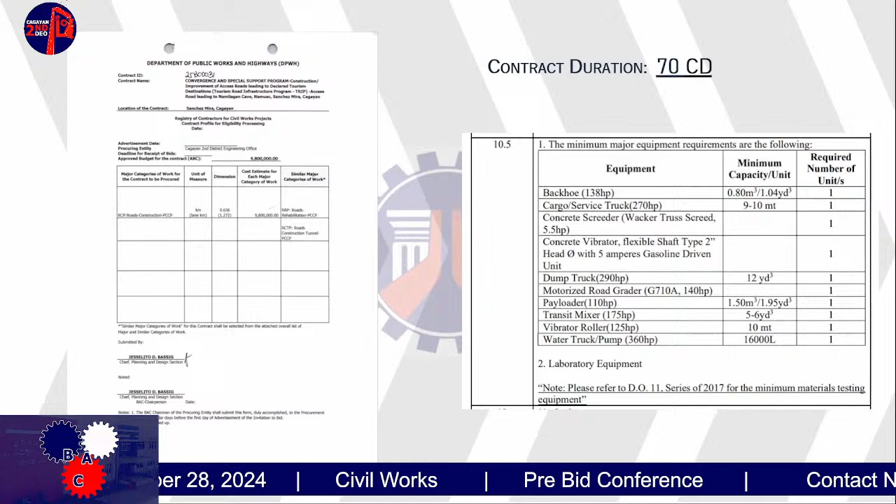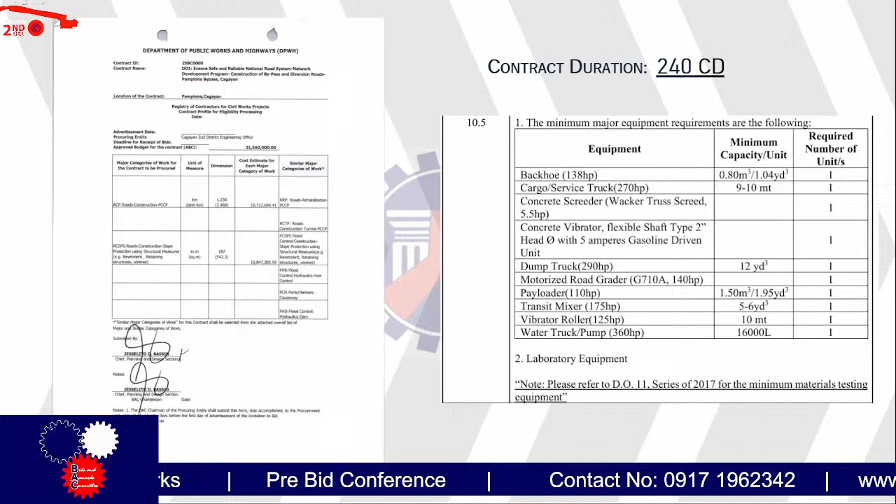Good morning, Mr. Chair. First project, contract ID 25BC0005. The contract name: Ensure Safe and Reliable National Road System, Network Development Program, Construction of Bypass and Diversion Roads, Pamplona Bypass, Cagayan. The approved budget for the contract is 21,560,000 pesos only. This project has two major categories of works.

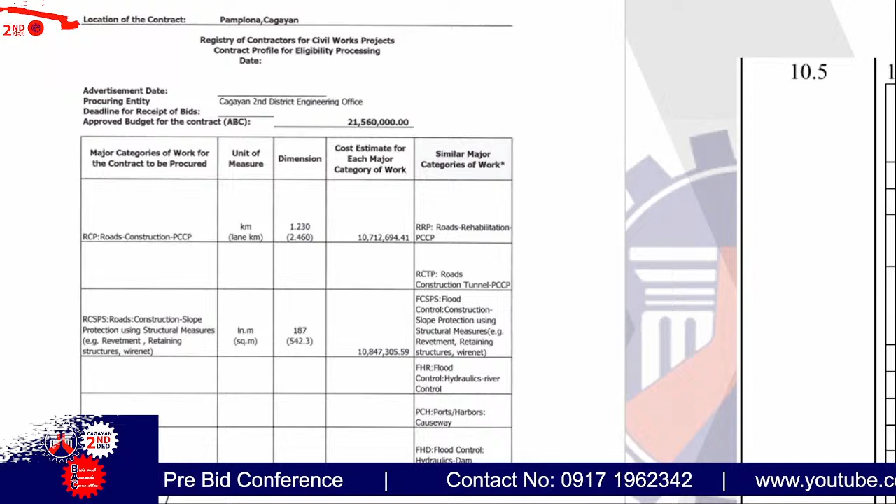Number one is RCP Roads Construction, PCCP. It has a length of 1.23 kilometers with a cost estimate of 10,712,694.41 pesos. The second major category of work is RCSPS, Roads Construction, Slope Protection using Structural Measures.

The length for the slope protection is 187 linear meters with a cost estimate of 10,847,305 pesos and 59 centavos. This project, Mr. Chair, has a total contract duration of 240 calendar days.

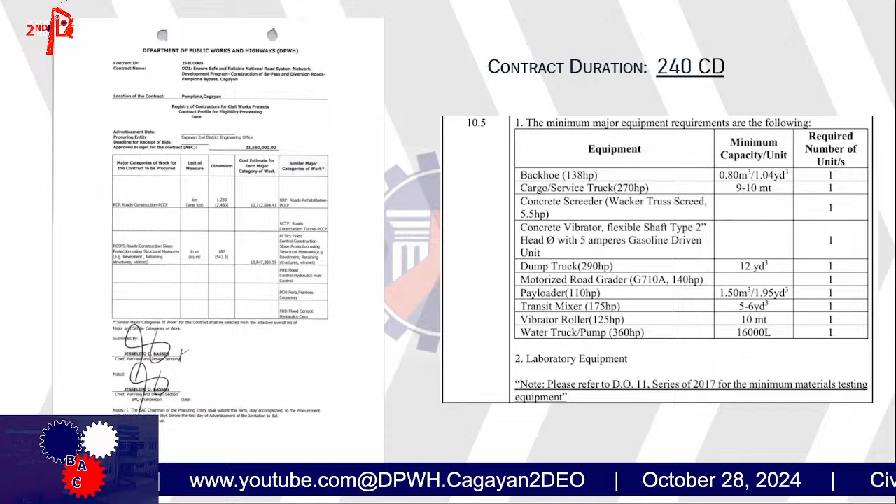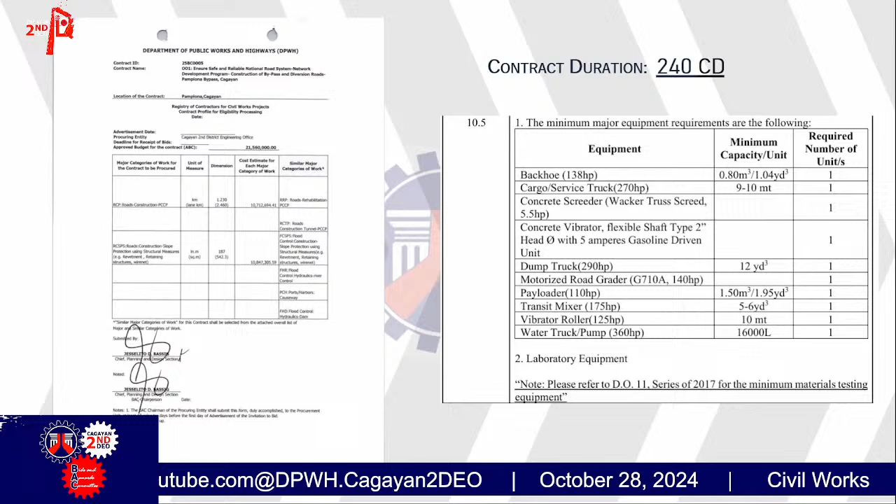The scope of works for this project, Mr. Chair, is the removal of actual structures, embankment from roadways, structure excavation, embankment from borrow, common soil, subgrade preparation, common material, aggregate sub-base course, crack and seat, PCCP 0.15 meter thick, PCCP 0.28 meter thick, structure excavation, foundation fill, pipe culverts and drain excavation for the slope protection, reinforcing steel grade 40, structural concrete, and pipe culvert with a diameter of 910 mm.

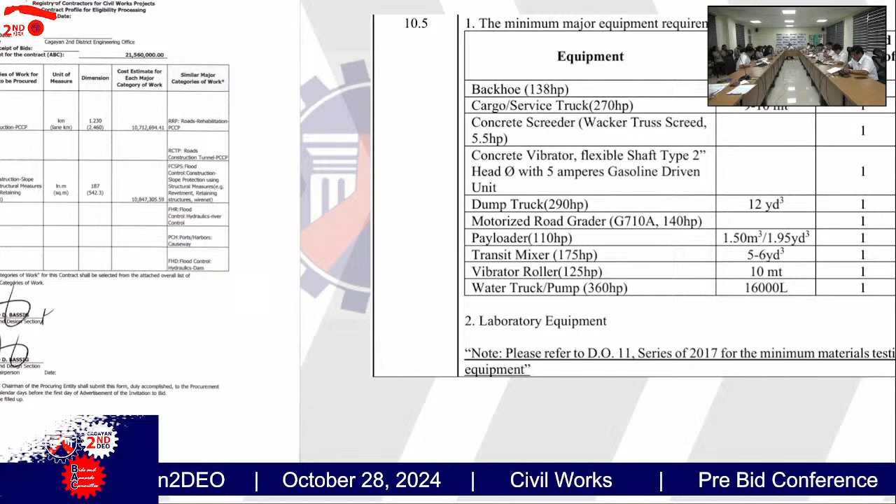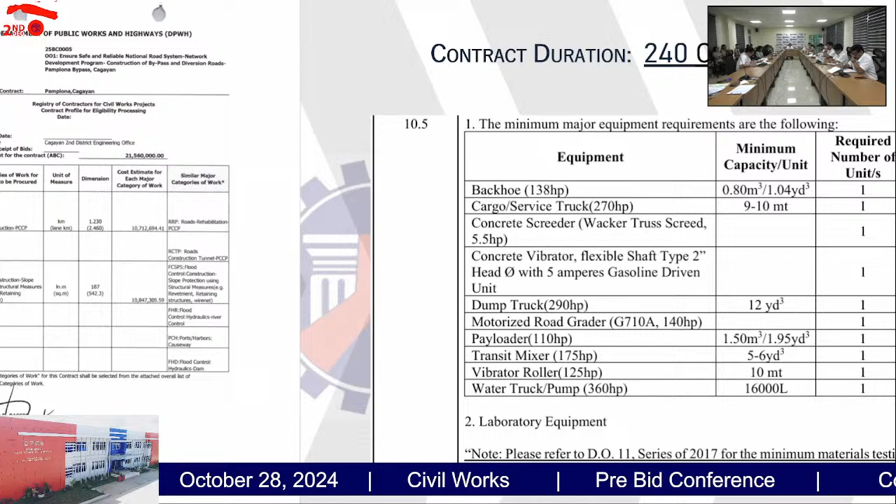The minimum equipment requirement for this project, Mr. Chair, is 1 backhoe, 1 cargo or service truck, 1 concrete screeder, 1 concrete vibrator, 1 dump truck, 1 motorized road grader, 1 payloader, 1 transit mixer, 1 vibratory roller, 1 water truck, and 1 sealer joint, Mr. Chair.

Okay. Any question? Any comment?

TWGs? Wala ba kayong comment? For correction?

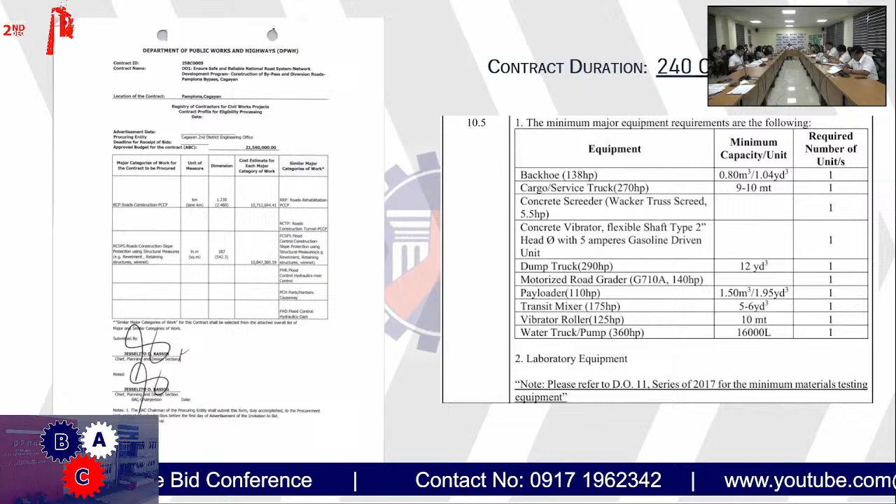So since there's none, let's proceed to the next project. Under contract ID 25BC0026, Convergence and Special Support Program, construction improvement of access roads leading to declared tourism destinations: Matukay, Silagan Road leading to Silagan Falls and Caves, Barangay Silagan, Allacapan, Cagayan. Okay?

Engineer Bunao, will you discuss this, please? Thank you, Mr. Chair. A pleasant morning to each and everyone.

Contract ID 25BC0026, Convergence and Special Support Program, construction improvement of access roads leading to declared tourism destinations: Matukay Silagan Road leading to Silagan Falls and Caves, Barangay Silagan, Allacapan, Cagayan. For the approved budget for the contract, 6,370,000 pesos. For the major categories of work for the contract to be procured: roads construction, PCCP, with a length of 353 meters. The contract duration of the project is 68 calendar days. For the scope of works, there are two components of the project.

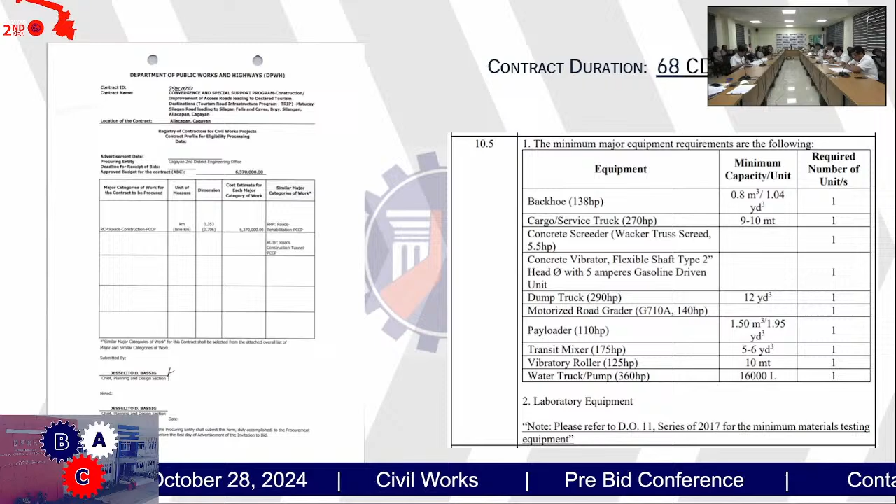For civil works 1: earthworks includes removal of trees, embankment from roadway structure excavation, embankment from borrow, subgrade preparation. For the sub-base and base course, item 200, aggregate sub-base course. For the surface course, gravel surface course and PCCP unreinforced with thickness of 15 centimeters and 23 centimeters respectively. For miscellaneous structures: trees, furnishing, and transplanting.

For civil works 2: earthworks includes structure excavation, foundation fill, pipe culverts, and drain excavation. For the drainage and slope protection structures: reinforcing steel, structural concrete, lean concrete, and RCPC with a diameter of 910 millimeters.

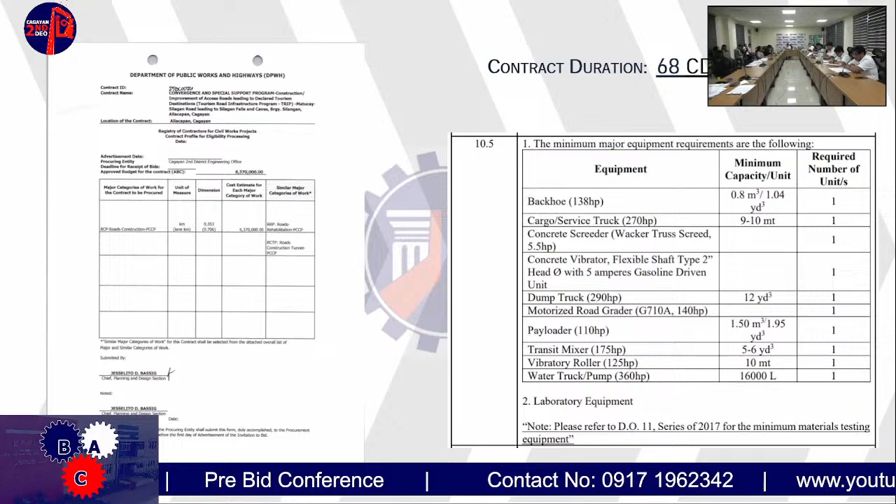For the minimum equipment requirement: 1 backhoe, 1 cargo service truck, 1 concrete screeder, 1 concrete vibrator, 1 dump truck, 1 motorized road grader, 1 payloader, 1 transit mixer, 1 vibratory roller, 1 water truck, and sealer joint. That's all, Mr. Chair.

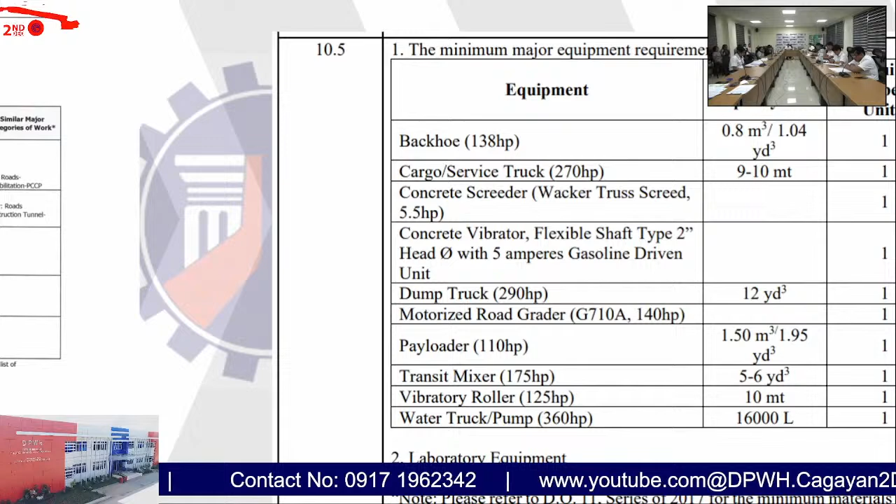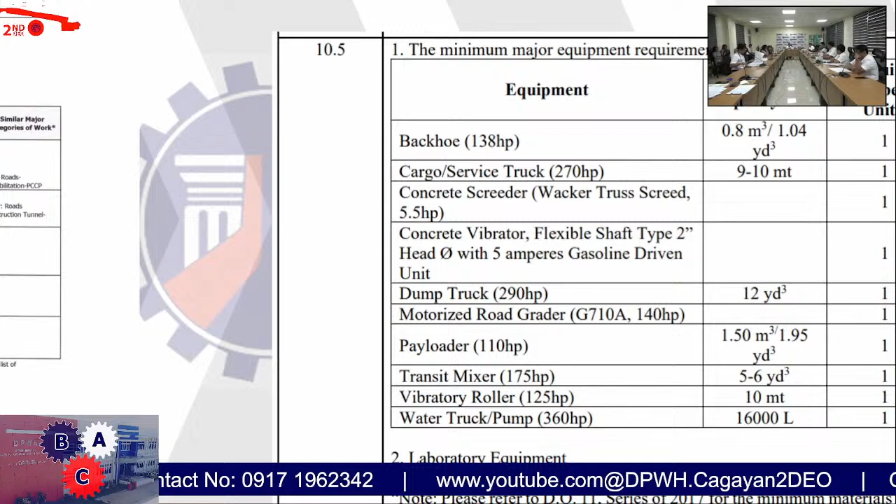Okay, any comment? I think there's none, so let's proceed to the next project. Convergence and Special Support Program, construction improvement of access road leading to declared tourism destinations: access road leading to Namilagan Cave, Namuac, Sanchez Mira, Cagayan.

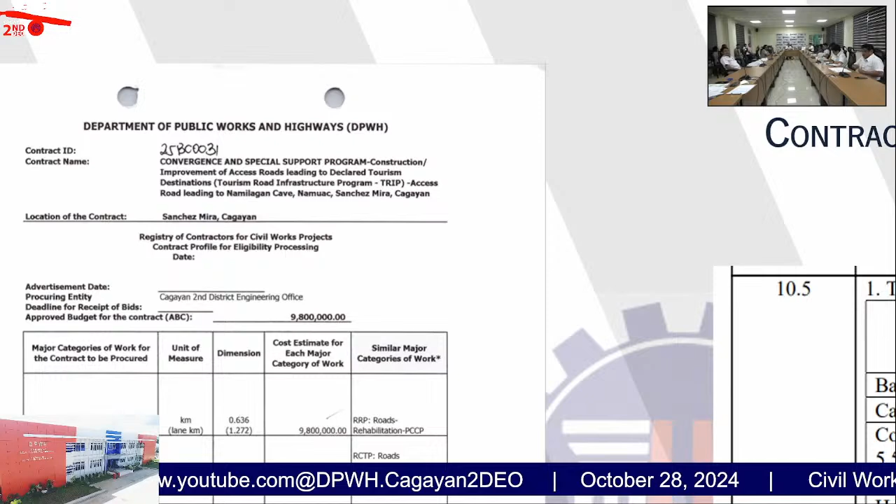Okay? Engineer Tesani, De la Cruz. Okay, good morning everyone. Mr. Chair, 25BC0031, Convergence and Special Support Program,

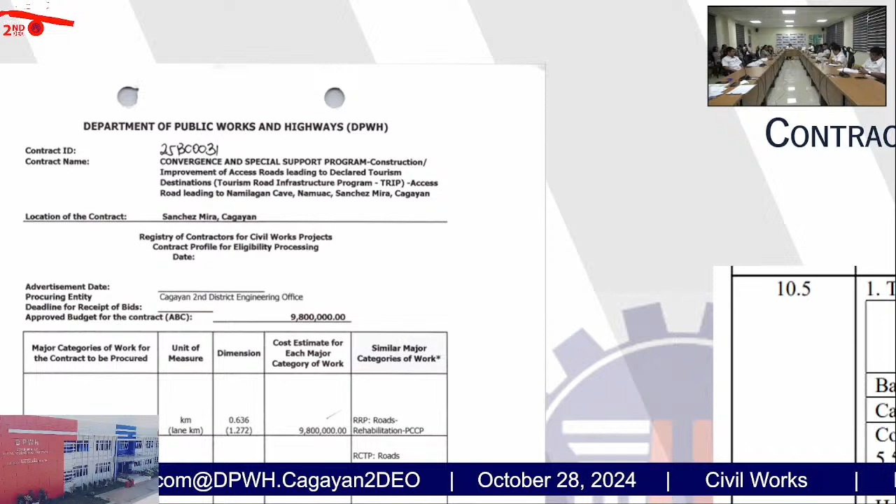construction or improvement of access roads leading to declared tourism destinations, Tourism Road Infrastructure Program, TRIP. Access road leading to Namilagan Cave, Namuac, Sanchez Mira, Cagayan, with an ABC of 9.8 million pesos. For the major categories of work for the contract to be procured: roads construction, PCCP, with a length of 636 meters, with the cost estimate for each major category of work at 9.8 million pesos.

For the minimum equipment requirement: one backhoe, one cargo or service truck, one screeder, one concrete vibrator, one dump truck, one motorized grader, one payloader, one transit mixer, one vibratory roller, one water truck or pump, and one sealer joint. Mr. Chair, the project has 70 calendar days.

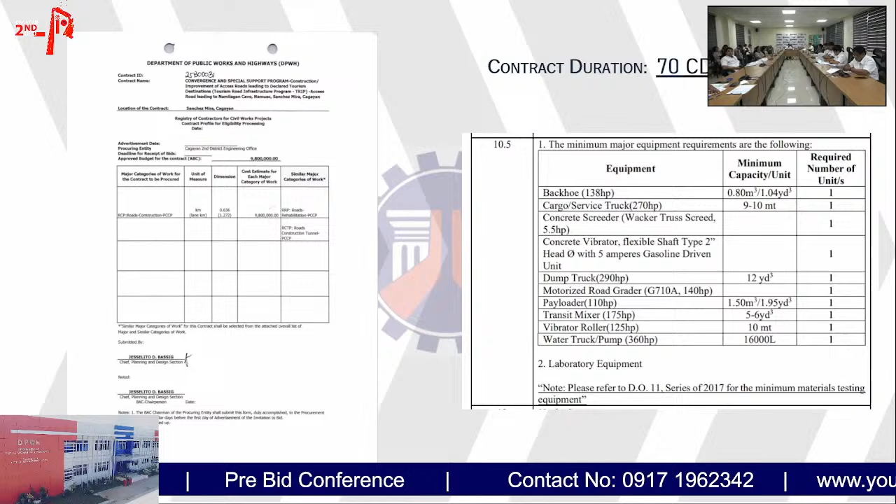For the scope of work, we have 2 civil works for this project. For civil works one, we have the facilities for the engineer, which includes provision of progress photographs for general requirements, permits and clearances, fees for the cutting of coconut trees, and 3 billboards, occupational safety and health program, traffic management, and mobilization or demobilization. For earthworks, this includes clearing and grubbing, individual removal of trees, embankment from roadway or structure excavation of common soil, embankment from borrow of common soil, subgrade preparation.

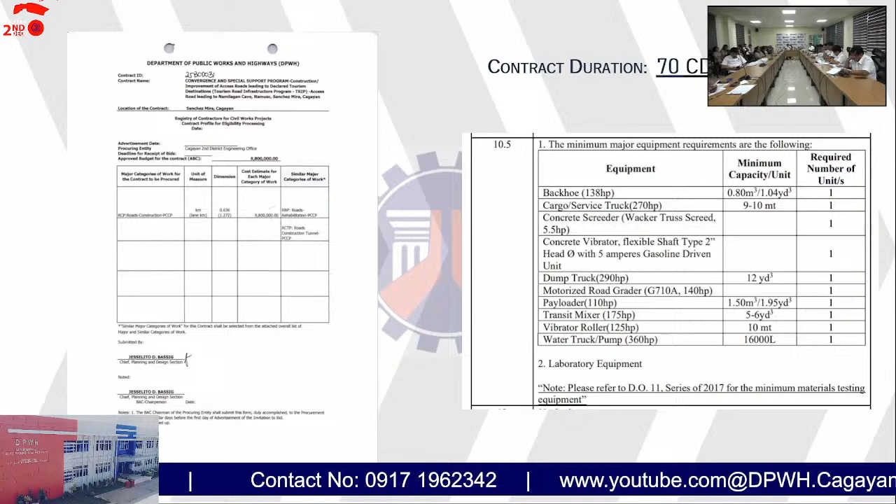For the sub-base and base course: aggregate sub-base course with a thickness of 0.2 meters. For the surface course, it includes gravel surface course for the gravel shoulder and PCCP 0.15 meter thick for the paved shoulder. For the carriageway, PCCP 0.23 meter thick, with miscellaneous structures which includes trees.

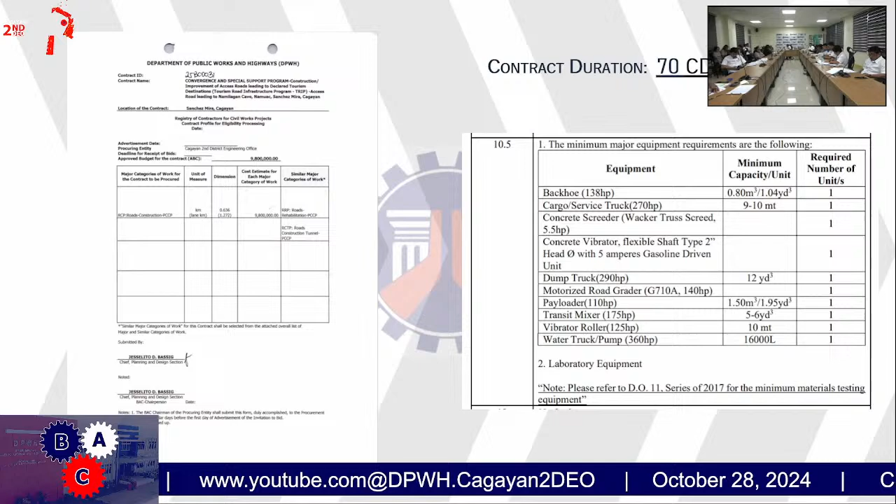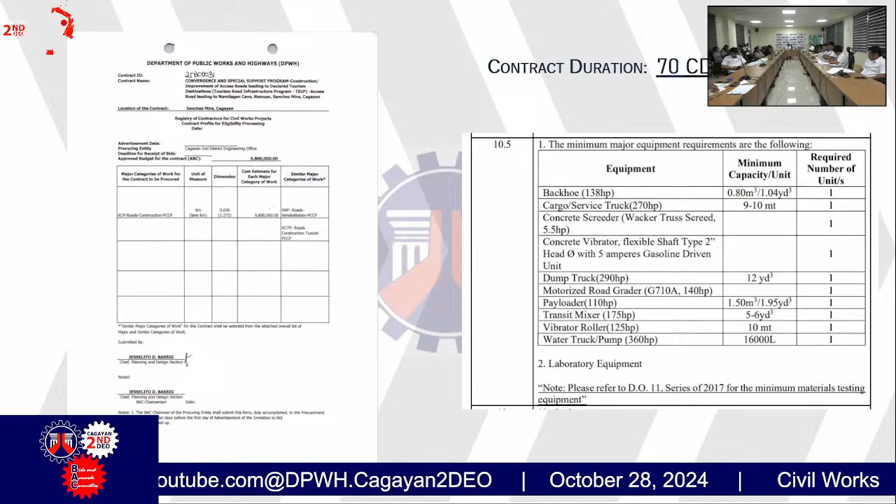And for civil works 2, it includes removal of existing structures or obstruction of 610 millimeter diameter RCPC, structure excavation, and foundation fill. For the drainage and slope protection structures, it includes reinforcing steel grade 40, structural concrete for retaining wall and head wall, lined canal, rectangular concrete, and pipe culverts for the extension of existing NIA cross drain. That's all, Mr. Chair, thank you.

Thank you. So the bid documents for this project is 10,000 pesos only.

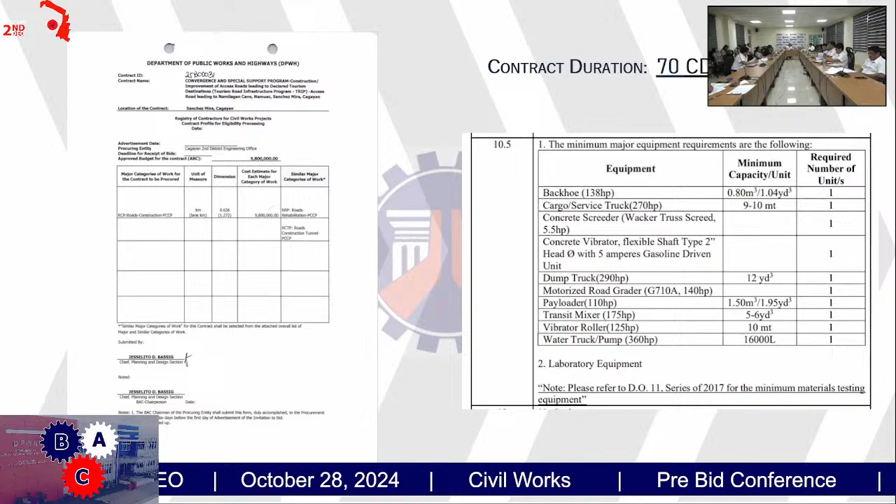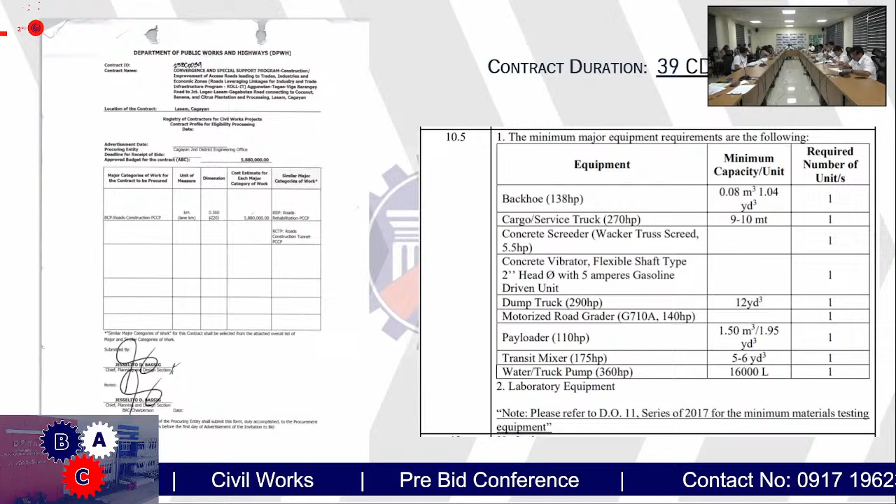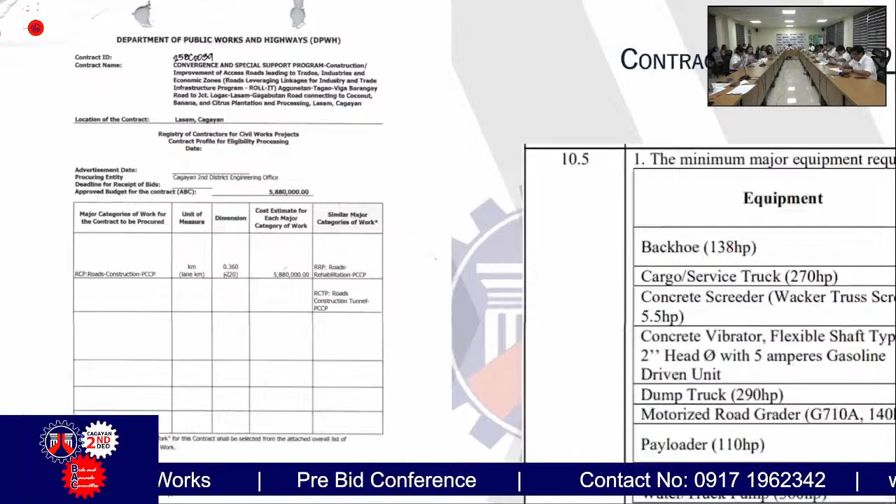Convergence and Special Support Program, construction improvement of access roads leading to trades, industries, and economic zones. Roads leveraging linkages for industry and trade infrastructure program, ROLL-IT, Aggunetan, Tagao, Viga Barangay Road to Junction Logac, Lasam Gagabutan Road, connecting to coconut, banana, and citrus plantation and processing, located at Lasam, Cagayan.

So, who will discuss this? Okay? Your... Okay, thank you, Mr. Chair. And good morning to everyone.

For contract ID number 25BC0039, Convergence and Special Support Program, Construction, Improvement of Access Road leading to trade, industries, and economic zones, linkages for industry and trade infrastructure program, Aggunetan, Tagao, Viga, Barangay Road to Junction Logac, Lasam, Gagabutan Road connecting to coconut, banana, and citrus plantation and processing, Lasam, Cagayan.

The budget for the contract is 5,880,000 pesos only. For the major categories of work for the contract to be procured: roads construction PCCP with a net length of 360 meters. Similar major categories of work: roads rehabilitation PCCP, roads construction tunnel PCCP. The contract duration is 39 calendar days.

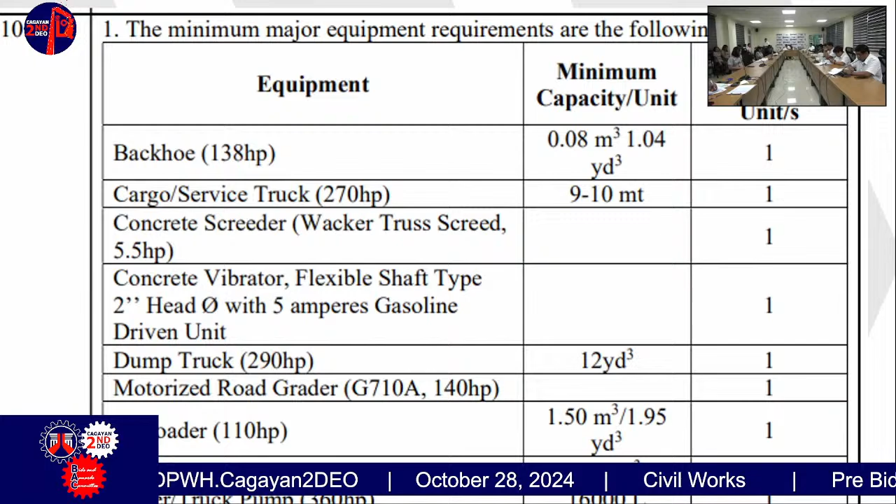For the scope of work to be done, we have the facilities for the engineer that includes provision of progress photographs, the other general requirements that includes project billboard, occupational safety and health program, traffic management, and mobilization and demobilization. For the earthworks, it includes surplus common excavation, foundation fill, embankment from roadway, subgrade preparation, and common materials. For the subbase and base course, it includes aggregate subbase course.

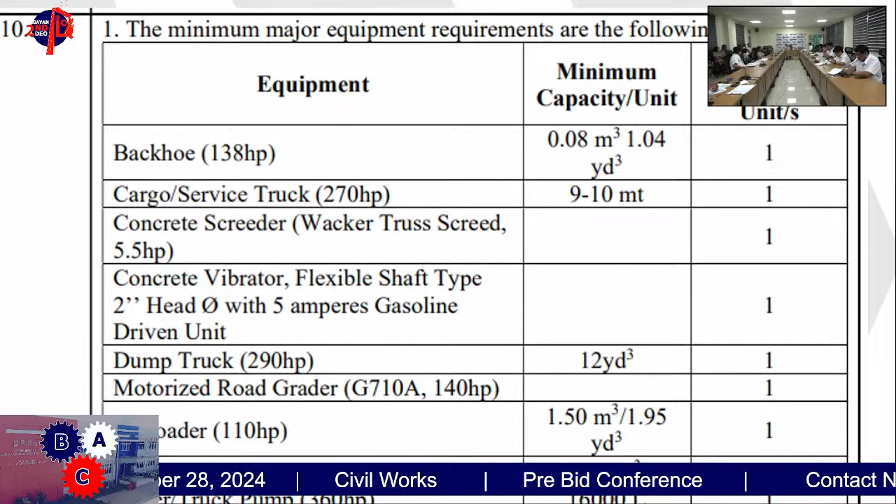For the surface course: gravel surface course, Portland cement concrete pavement unreinforced 0.15 meter thick, Portland cement concrete pavement unreinforced 0.28 meter thick. And the miscellaneous structures includes curb and gutter precast.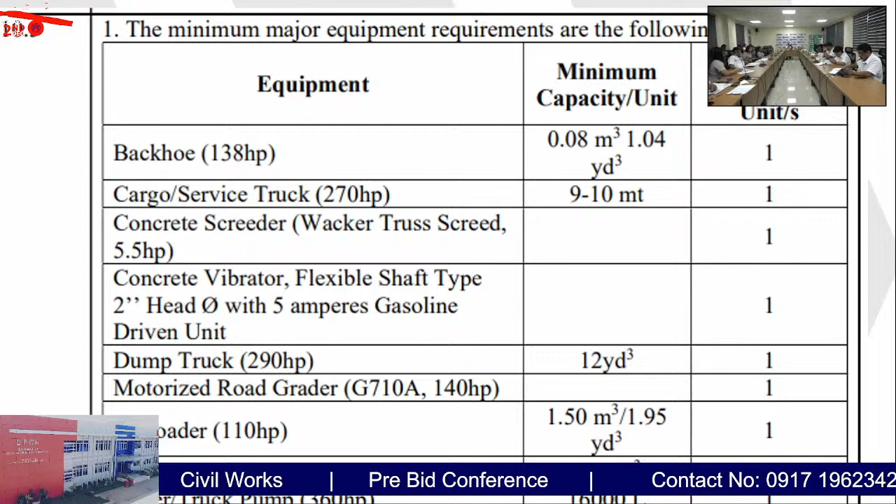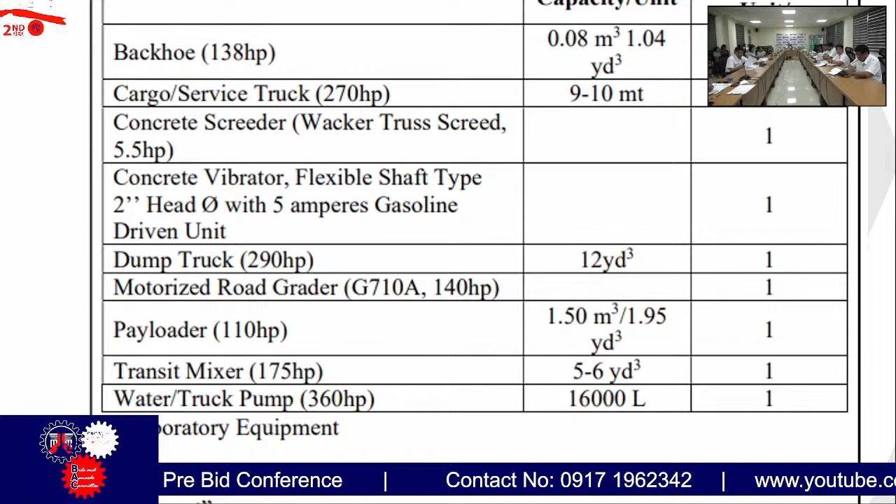For the minimum equipment requirement for this project, we have one backhoe with a capacity of 0.08 cubic meter, one cargo service truck with a capacity of 9 to 10 metric tons, one concrete screeder, one concrete vibrator, one dump truck with a capacity of 12 cubic yards, one motorized road grader, one payloader, one transit mixer with a capacity of 5 to 6 cubic yards, one vibratory roller, one water truck, and one sealer joint. That's all, Mr. Chair.

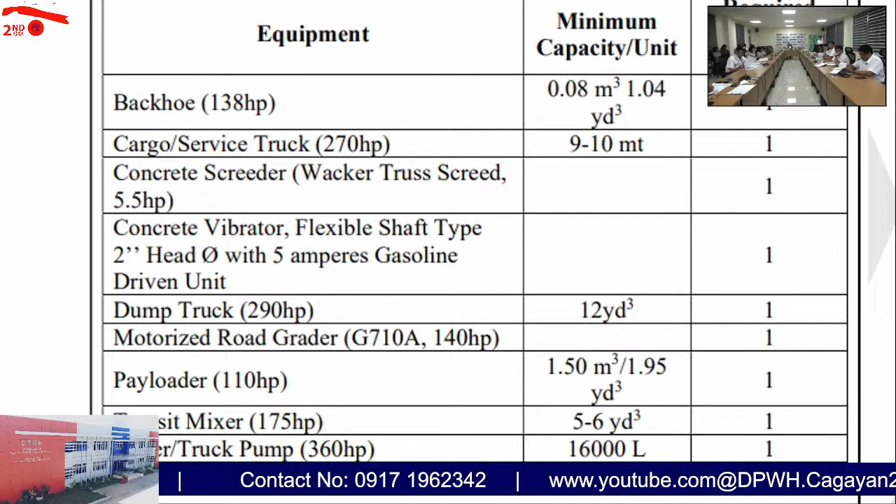Okay, any comment? The bid documents for this particular project is 10,000 pesos only. Mr. Chair, may I also require the Secretariat to monitor our live streaming if there are comments? Yeah.

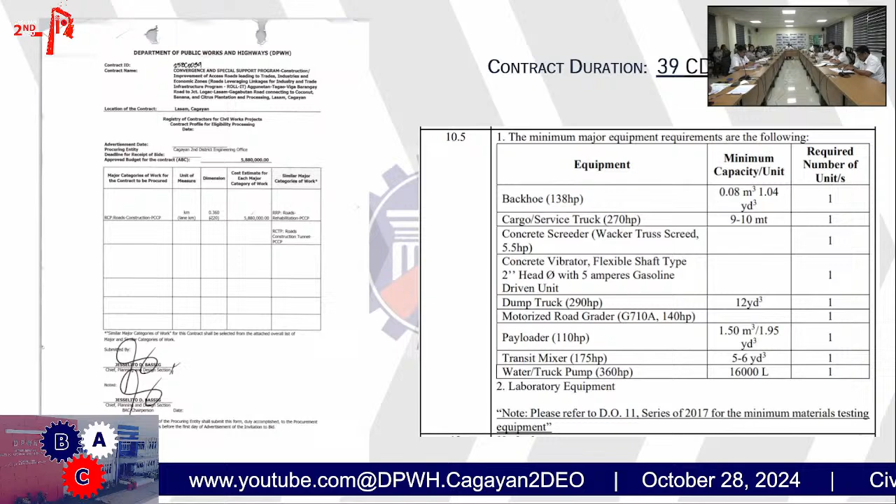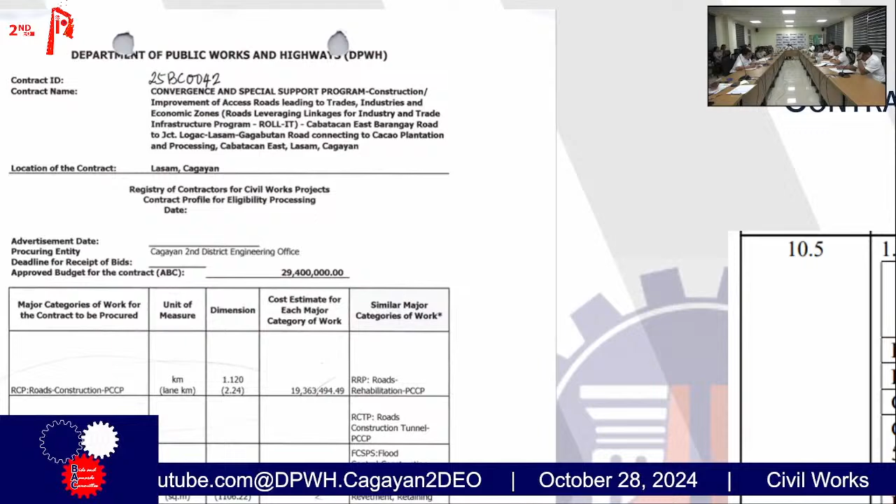Convergence and Special Support Program, construction improvement of access roads leading to trades, industries, and economic zones. Roads leveraging linkages for industry and trade infrastructure program, ROLL-IT, Cabatacan East Barangay Road to Junction Logac Lasam Gagabutan Road, connecting to cacao plantation and processing, Cabatacan East Lasam Cagayan.

The bid documents for this project is 25,000 pesos only. So may I request one of our TWG here to read the description of this particular project. You know... King. Okay, King, let's. Good morning, Mr. Chair.

The next project is 25BC 0042. The contract name, Convergence and Special Support Program, construction improvement of access roads leading to trade, industries, and economic zone, roads leveraging linkages for industry and trade infrastructure program, ROLL-IT, Cabatacan East, Barangay Road to Junction, Logac, Lasam, Gagabutan Road, connecting to cacao plantation and processing, located at Cabatacan East, Lasam, Cagayan.

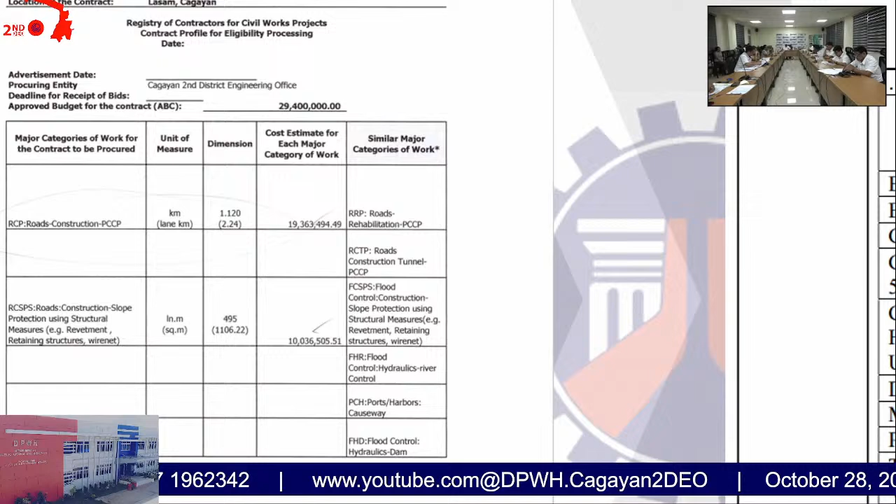The next major category of work is the RCSPS, Roads Construction Slope Protection using structural measures. The length of this slope protection is 495 linear meters with a cost estimate of 10,036,505 pesos and 51 centavos. This project has a total contract duration of 214 calendar days.

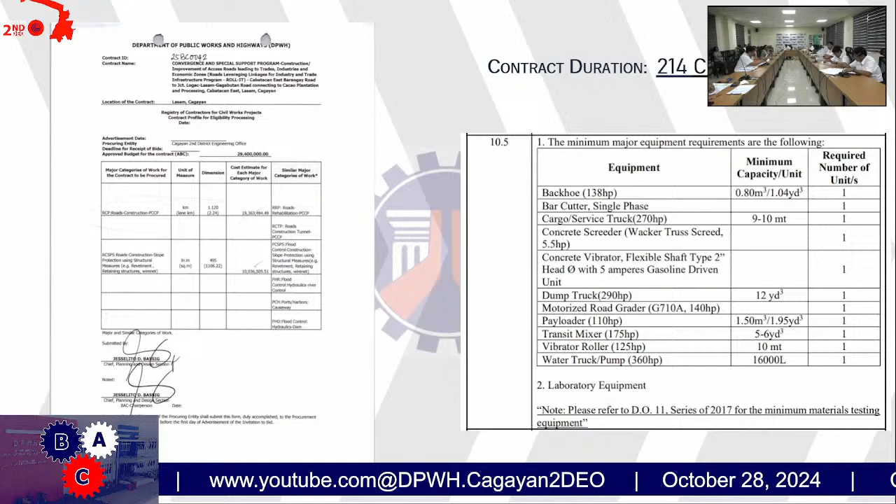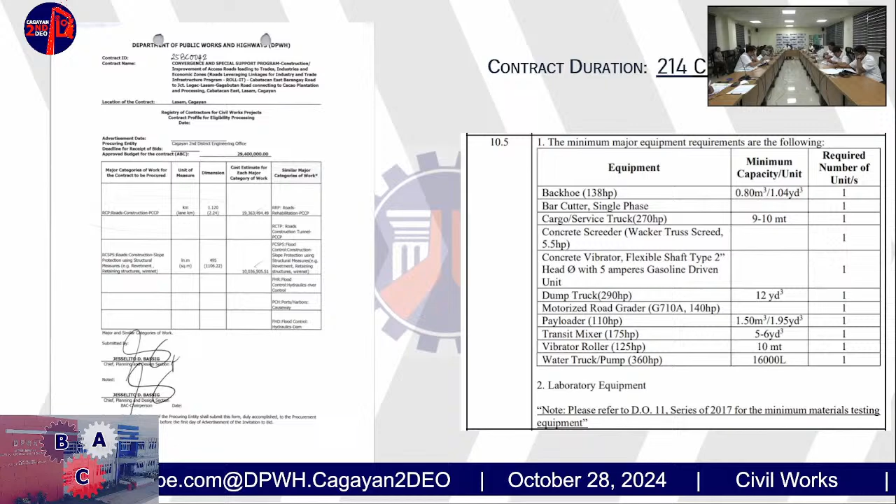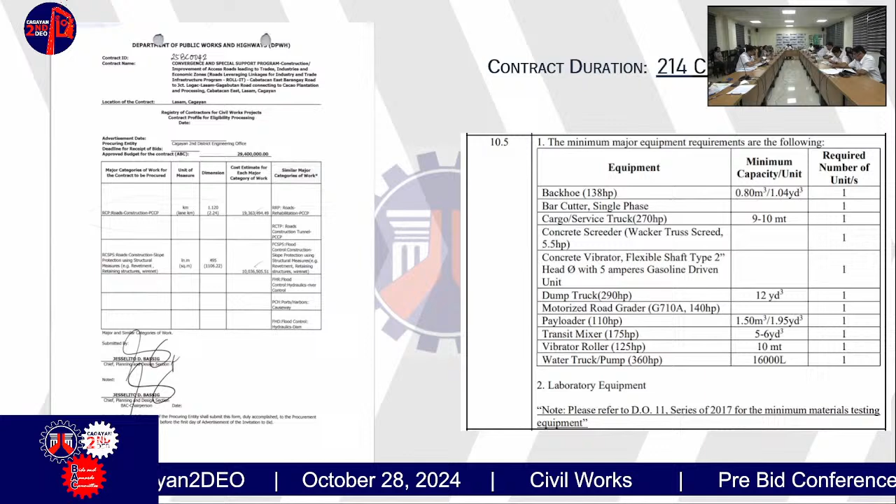The scope of works for this project, for the roads, is clearing and grubbing, individual removal of trees 150 to 300mm diameter, individual removal of trees 301 to 500, as well as 751 to 900mm diameter. Surplus common excavation, embankment from roadway, structure excavation, subgrade preparation, common material, aggregate sub-base course, gravel surface course, PCCP 0.15 meter thick, PCCP 0.28 meter thick, and for the trees, furnishing and transplanting.

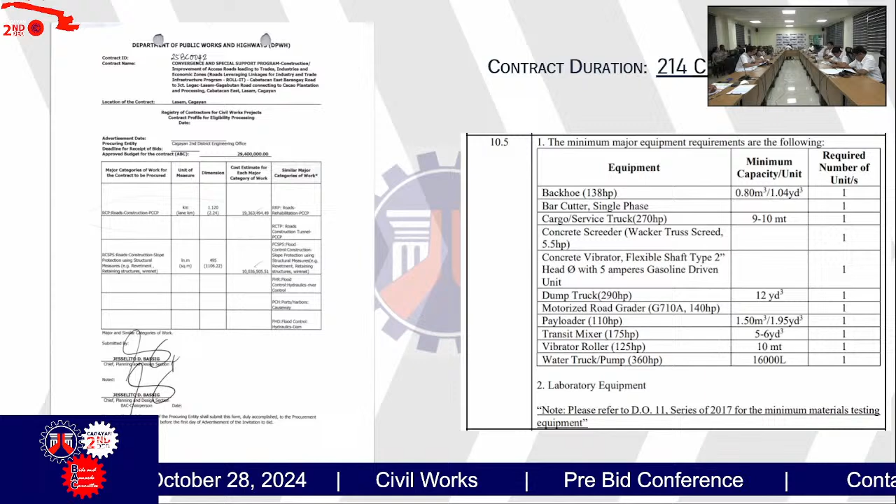For civil works 2, we have the structure excavation common soil, foundation fill, pipe culverts and drain excavation, reinforcing steel grade 40, structural concrete 20.68 megapascal class A, pipe culverts 910mm in diameter.

The minimum equipment requirement for this contract is 1 backhoe, 1 bar cutter, 1 cargo or service truck, 1 concrete screeder, 1 concrete vibrator, 1 dump truck, 1 motorized road grader, 1 payloader, 1 sealer joint, 1 transit mixer, 1 vibratory roller, and 1 water truck.

For the information of everybody, we have a proposed supplemental bulletin for this project for an additional item, which is the clearing and grubbing. This project has a total length of 1,120 meters or 2.24 lane kilometers. That's all, Mr. Chair.

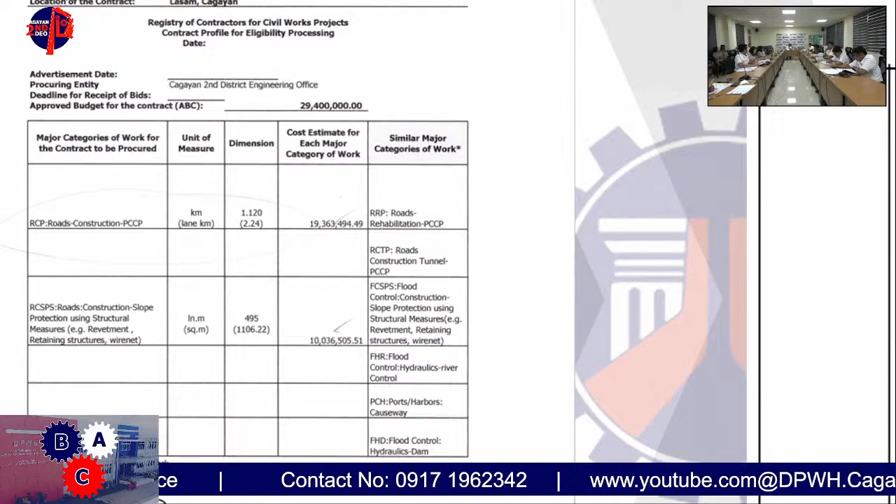Mr. Head, Bids Secretariat, is there a bid bulletin for this? Is there any?

Not yet posted, sir. It is a proposed supplemental bulletin. Also, for the information of the body, the schedule for the opening of bid will also be adjusted to meet the requirements of RA 9184, which requires 12 days from the conduct of the pre-bid conference. Okay, please take note of that.

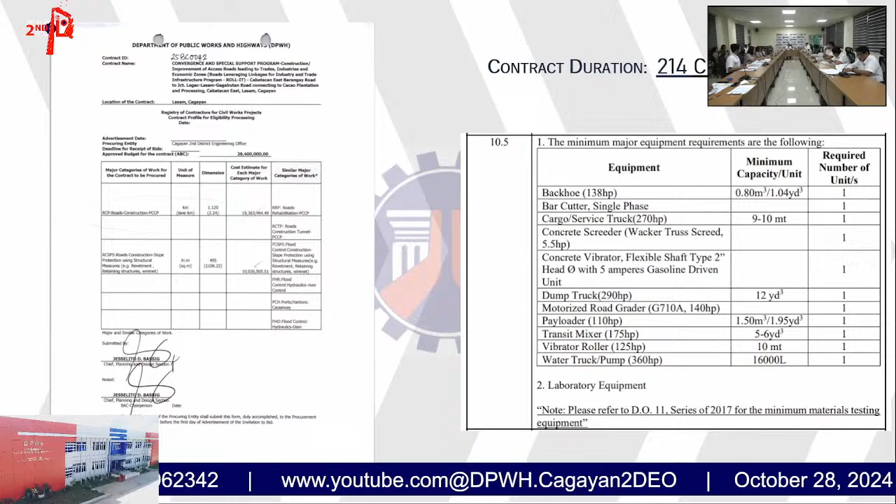So any other query, question, or comment? Mr. Chair, I would like to also clarify the first project, the Pamplona bypass.

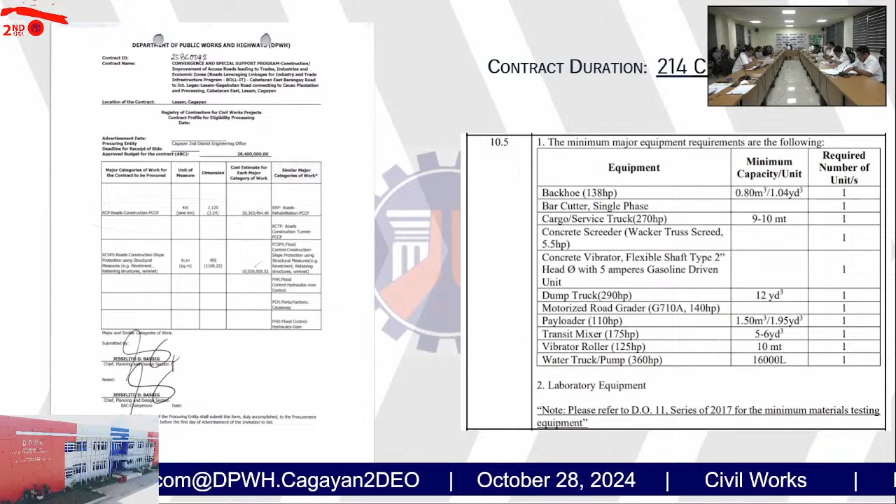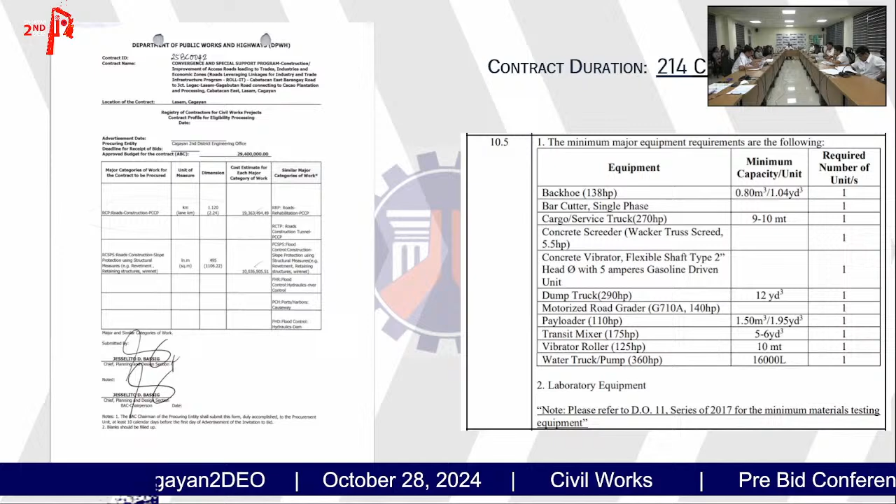We have also a proposed supplemental bulletin. The original posted length for the RCP is 1.23 kilometers, but the corrected length of the first civil work, which is the RCP, is 0.593 kilometer.

And also for the civil works two, Mr. Chair, the road slope protection: the original length is 187 linear meters, and the corrected length of the slope protection, Mr. Chair, is 873 linear meters.

That's all, Mr. Chair. Okay, please take note, Bids Secretariat, of the changes so that we could post that in our bulletin, maybe today. If all documents are prepared today, we will also post this today.

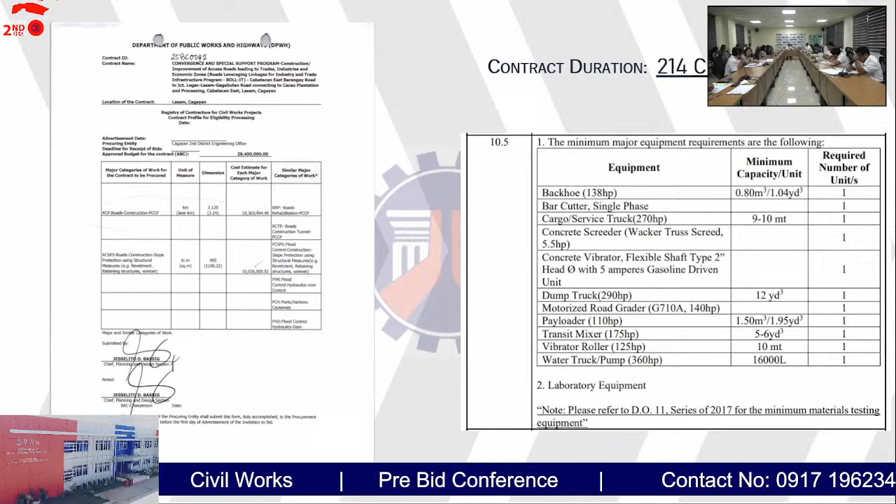Can we not prepare it today so that... Yes, sir, we will try to post it today, sir. Okay, please take note.

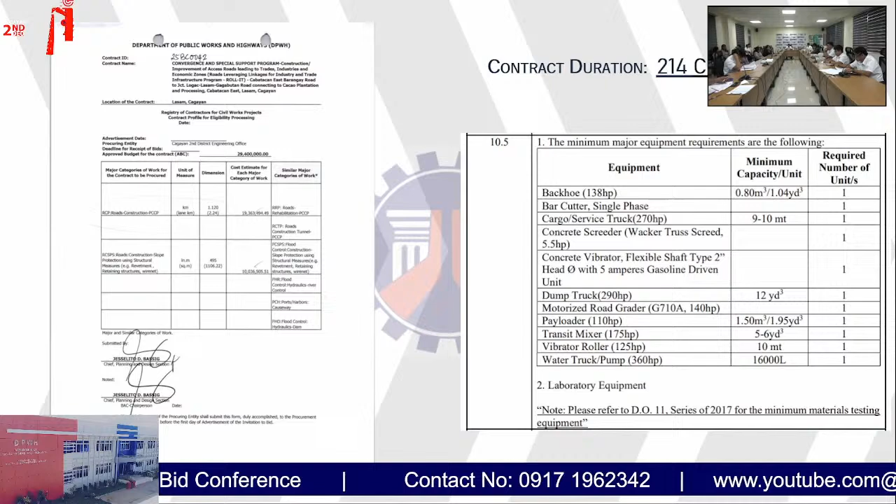Okay, let's proceed to the next: Convergence and Special Support Program, construction and/or improvement of access roads leading to trades, industries, and economic zones, roads leveraging linkages for industry and trade infrastructure program, ROLL-IT.

Dungon Barangay Road to Manila North Road connecting to agribusiness industry, at Santa Cruz, Pamplona, Cagayan. Bid documents for this is 10,000 pesos only.

So we will discuss this. Mr. Chair, contract 425BC0047, contract name: Convergence and Special Support Program, construction or improvement of access roads leading to trades, industries, and economic zones, roads leveraging linkages for industry and trade infrastructure program, ROLL-IT, Dungon Barangay Road to Manila North Road connecting to agribusiness industry, Nipa and Corn, at Santa Cruz, Pamplona, Cagayan, with an approved budget for the contract of 5,390,000 pesos. For the major categories of work: roads construction, PCCP,

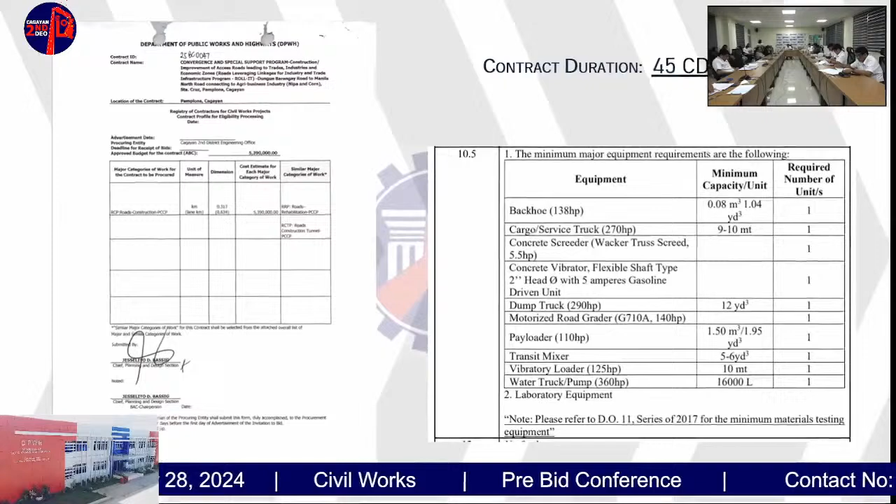For the scope of work, we have two civil works again for this project. Civil works 1 includes clearing and grubbing, individual removal of trees, embankment from roadway or structure excavation, embankment from borrow, common soil, subgrade preparation, common material, aggregate sub-base course, 0.15 meter thick.

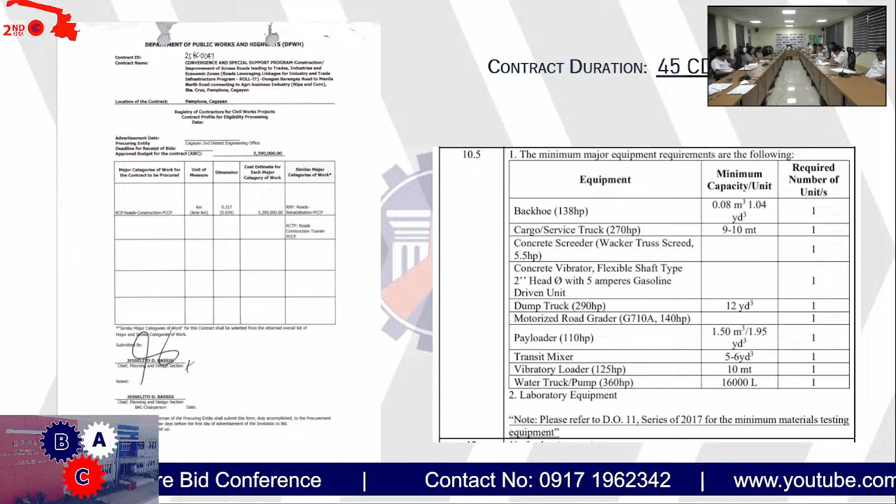For the gravel shoulder, gravel surface course, and for the paved shoulder, PCCP 0.15 meter thick. And for the carriageway, 0.28 meter thick PCCP, with trees furnishing and transplanting.

For civil works 2, this includes the retaining wall and parapet wall, which includes items: structure excavation, foundation fill, reinforcing steel grade 40, and structural concrete class A. That's all, Mr. Chair. Okay, thank you.

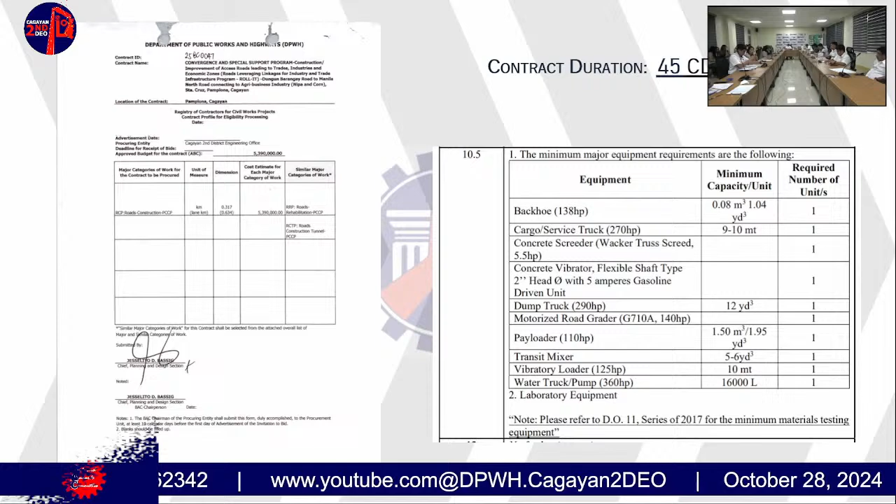Any comment or changes? Are there bid bulletins for this? None, sir. Okay. So the amount of bid documents for this project is 10,000 pesos only. So let's proceed to the next project.

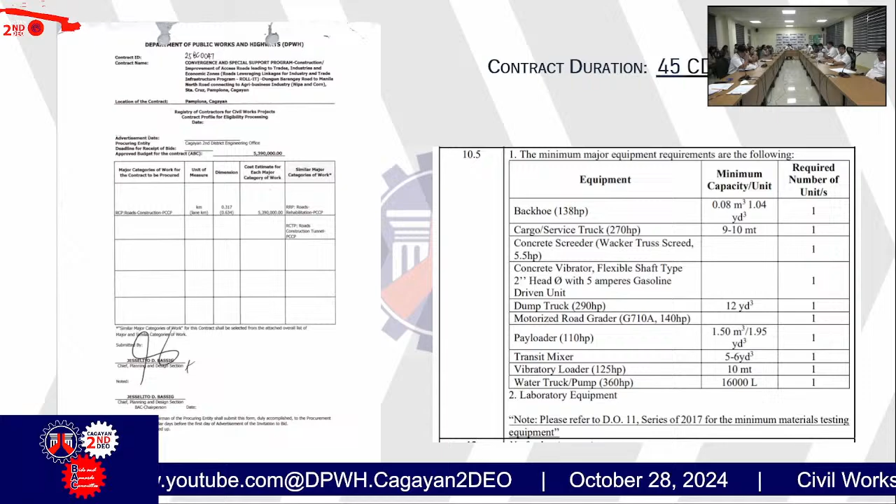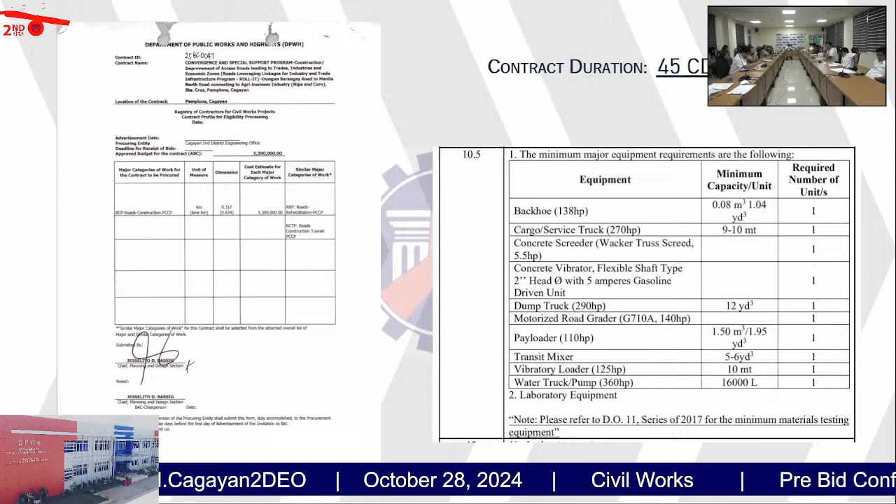Convergence and Special Support Program, construction and/or improvement of access roads leading to trades, industries, and economic zones, roads leveraging linkages for industry and trade infrastructure program, ROLL-IT, Dungao Barangay Road, Sitio Limutong to Manila North Road, connecting to agribusiness industry, Nipa and corn, located at Santa Cruz, Pamplona, Cagayan.

The cost of bid documents for this project is 25,000 pesos only. Okay, we will discuss this. Okay, proceed. The next project is 25BC0048.

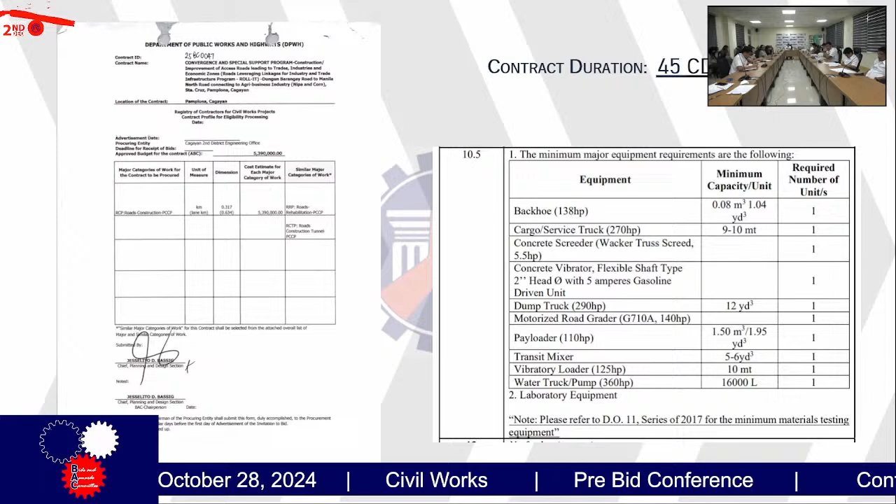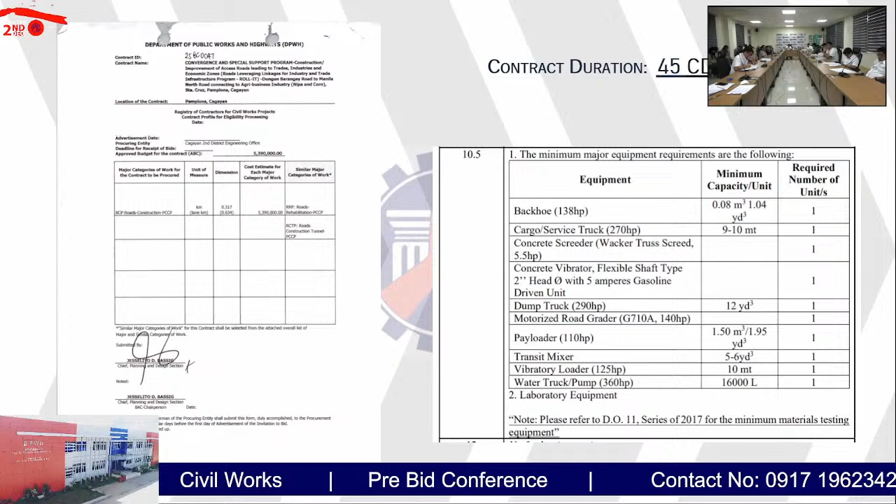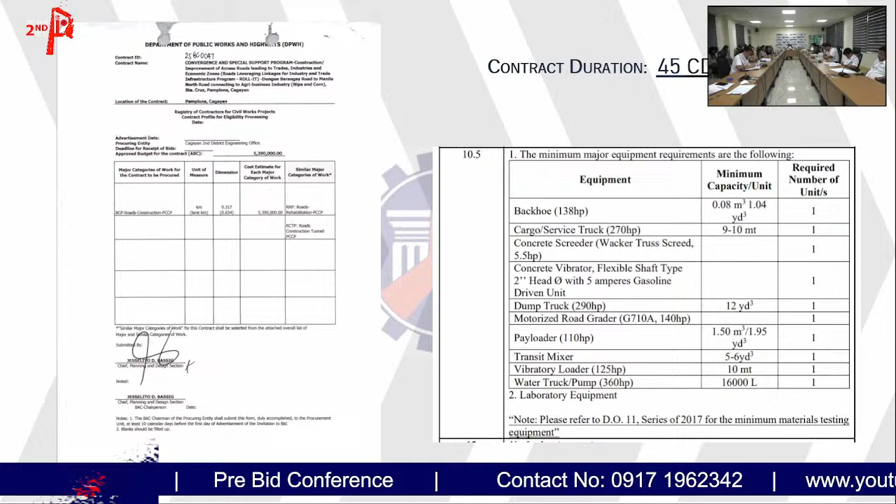Contract name: Convergence and Special Support Program, Construction Improvement of Access Roads Leading to Trades, Industries, and Economic Zones, ROLL-IT, Dungao Barangay Road, Sitio Lumitong to Manila North Road, connecting to agribusiness industry, Nipa and Corn, Santa Cruz, Pamplona, Cagayan. The approved budget for the contract is 11,319,000 pesos. The major categories of work for the contract to be procured is RCP, Roads Construction, PCCP, with a length of 488 meters, with a cost estimate of 11,319,000 pesos. The total contract duration for this contract is 107 calendar days.

The scope of works for this contract is clearing and grubbing, individual removal of trees, removal of structures and obstruction, embankment from roadway structure excavation, embankment from borrow, subgrade preparation, aggregate sub-base course, gravel surface course, PCCP with a thickness of 0.15 meter, PCCP with a thickness of 0.28 meter, structural concrete, trees with furnishing and transplanting.

For the drainage and slope protection structure: structure excavation common soil, foundation fill, reinforcing steel grade 40, structural concrete, and lean concrete.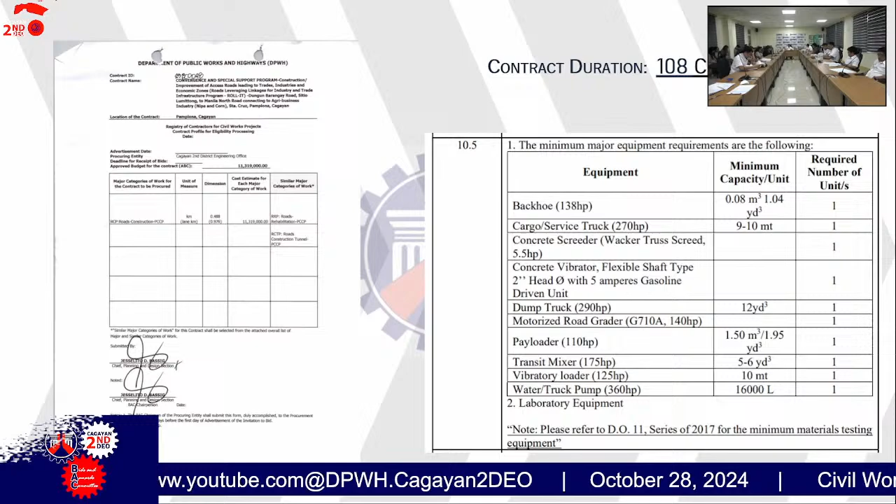The minimum equipment requirement for this contract, Mr. Chair, is 1 backhoe, 1 cargo service truck, 1 concrete screeder, 1 concrete vibrator, 1 dump truck, 1 motorized road grader, 1 payloader, 1 transit mixer, 1 vibratory roller, 1 water truck, and 1 sealer joint. That's all, Mr. Chair.

Any bid bulletin for this particular project? None, sir. Okay, let's proceed to the next project.

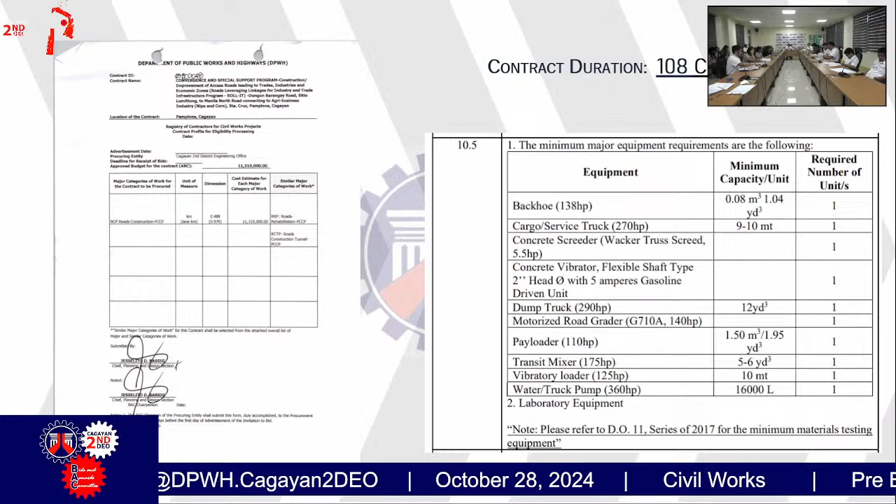Convergence Special Support Program, Construction Improvement of Access Roads Leading to Trades, Industries, and Economic Zones. Roads Leveraging Linkages for Industry and Trade Infrastructure Program, ROLL-IT. Bannag Road connecting to vegetable, corn, coconut, and dragon fruit, located at Santa Rosa, Abulug, Cagayan.

The amount of bid documents for this particular project is 25,000 pesos only. Okay, let's proceed to the brief description of this project.

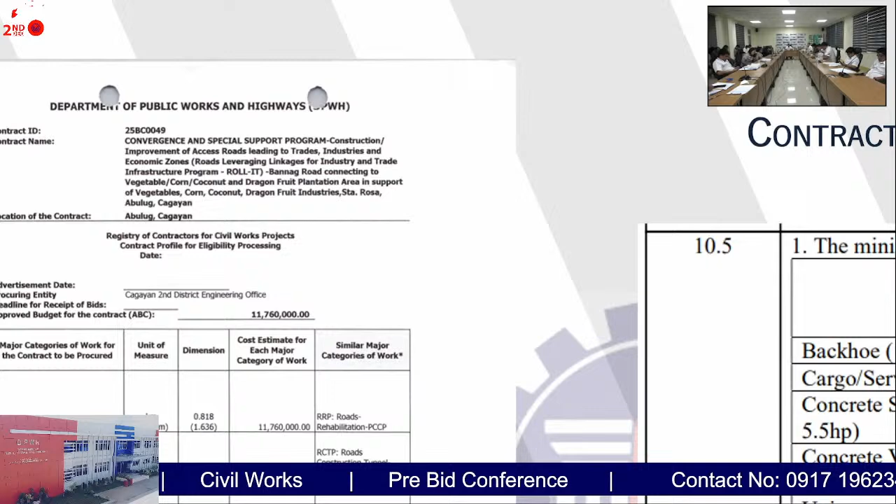Engineer Tisani: Thank you, Mr. Chair. For contract ID number 25BC 0049, Convergence and Special Support Program, Construction Improvement of Access Roads Leading to Trades, Industries, and Economic Zones. Roads Leveraging Linkages for Industry and Trade Infrastructure Program, ROLL-IT. Bannag Road connecting to vegetable, corn, coconut, and dragon fruit plantation area in support of vegetable, corn, coconut, dragon fruit industries, Santa Rosa, Abulug, Cagayan. The approved budget for the contract is

11,760,000 pesos only. The major categories of work for the contract to be procured: roads, construction, PCCP. And the similar major categories of work: roads, rehabilitation, PCCP, roads, construction, tunnel, PCCP. The project length is 818 meters with a contract duration of 65 calendar days.

The main scope of works are: roads leveraging linkages for industry and trade infrastructure program, ROLL-IT, Bannag Road connecting to vegetable, corn, coconut, dragon fruit industries, Santa Rosa, Abulug, Cagayan. The approved budget for the contract is 11,760,000 pesos only. The major categories of work: roads, rehabilitation, PCCP, roads, construction, tunnel, PCCP. The main scope of works,

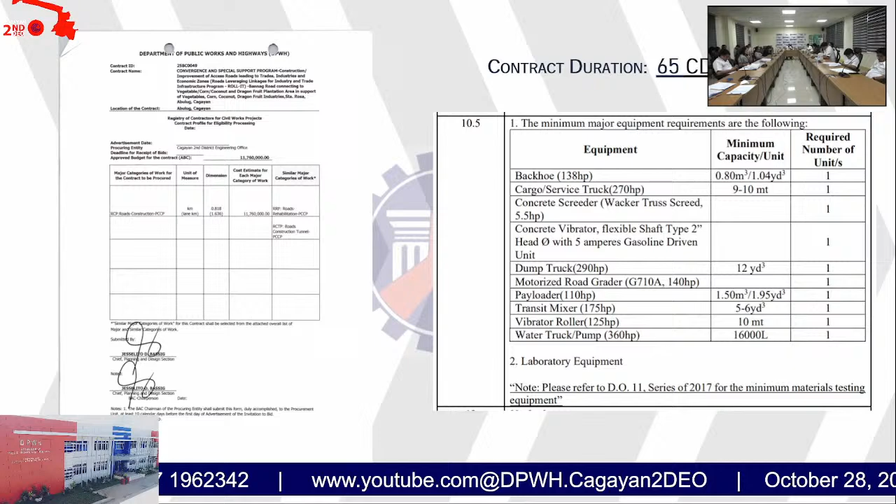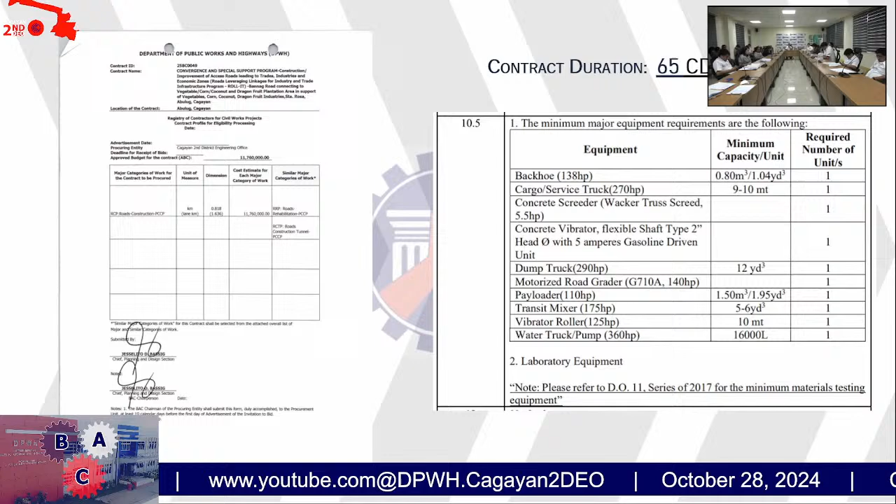earthworks, which includes embankment from roadway excavation, embankment from borrow, and subgrade preparation. Subbase and base course, which include aggregate subbase course, and surface course, which includes gravel surface course and Portland cement concrete pavement, unreinforced, 0.28 meter thick for 14 days.

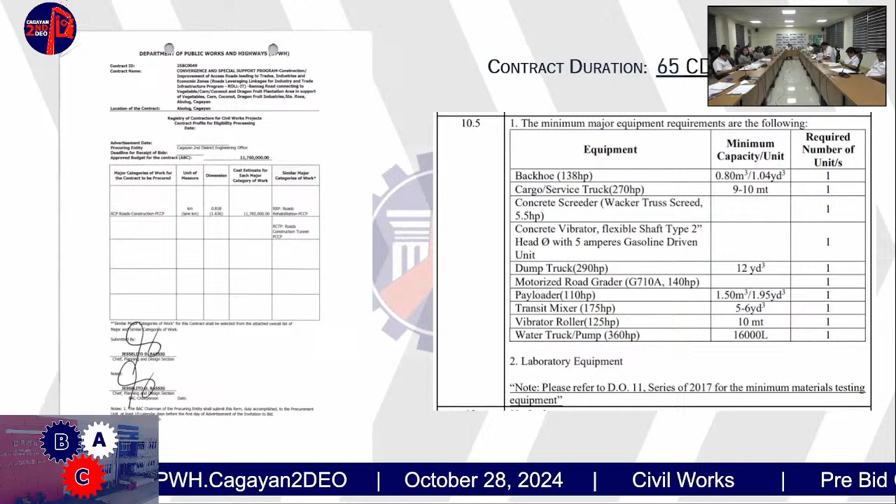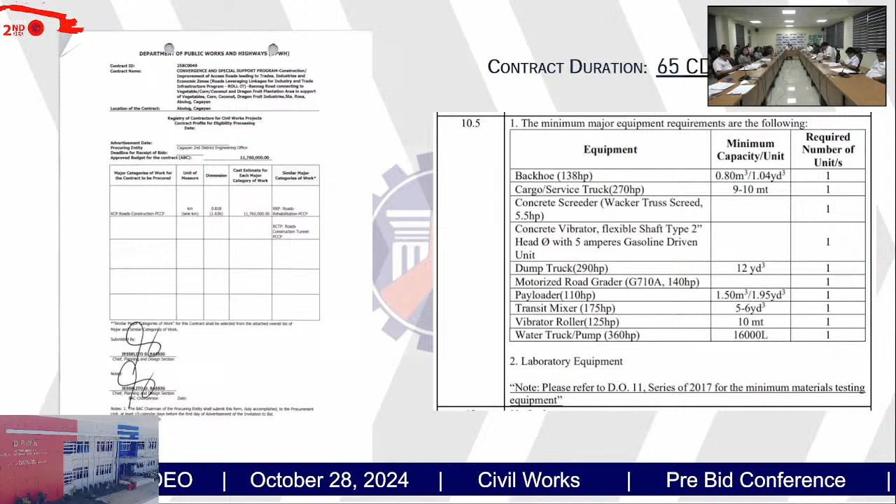And for the minimum equipment requirement: backhoe with a capacity of 0.8 cubic meter, cargo truck with a capacity of 9 to 10 metric tons, concrete screeder, concrete vibrator, dump truck with a capacity of 12 cubic yard, motorized road grader, payloader with a capacity of 1.5 cubic meter, transit mixer with a capacity of 5 to 6 cubic yards, vibratory roller with a capacity of 10 metric tons, water truck with a capacity of 16,000 liters, and sealer joint.

That's all, Mr. Chair. Okay, is there any supplementary and or bid bulletin for this project? None, sir. Okay, so let's proceed to the last project.

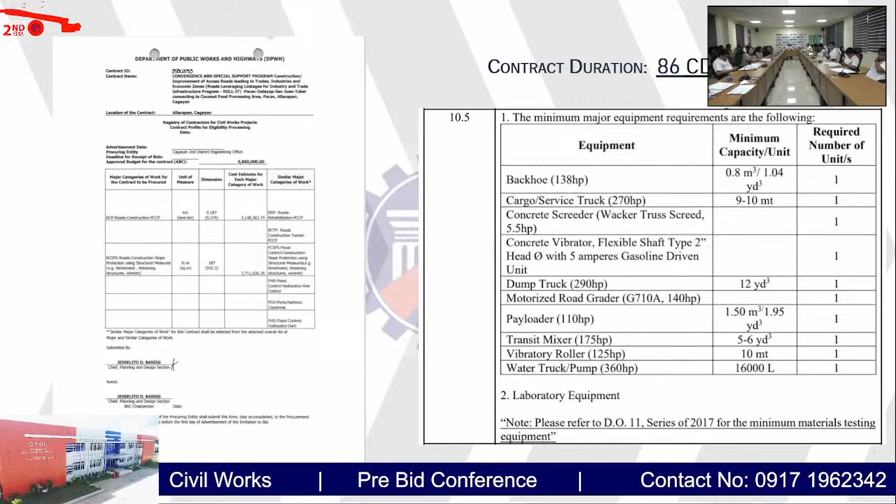Convergence and Special Support Program, construction improvement of access roads leading to trades in the industries and economic zones. Roads leveraging linkages for industry and trade infrastructure program, ROLL-IT. Pakak, Dalayap, San Juan, Tubel connecting to Coconut Food Processing Area at Pakak, Allacapan, Cagayan. The amount of bid documents for this particular project is 10,000 pesos only.

May I request Engineer Bunao to read the details and or scope of work for this particular project, for the next project,

25BC0053, Convergence and Special Support Program, construction improvement of access roads leading to trades, industries, and economic zones, roads leveraging linkages for industry and trade infrastructure program, Roll It, Pakak, Dalayap, San Juan, Tubel, connecting to Coconut Food Processing Area, Pakak, Allacapan, Cagayan. The approved budget for the contract, 6,860,000.

For the major categories of work for the contract to be procured, there are two. Roads construction PCCP, which has cost estimate of 3,148,363 and 74 centavos. Roads construction slope protection using structural measures, cost estimate of 3,711,636 pesos and 26 centavos.

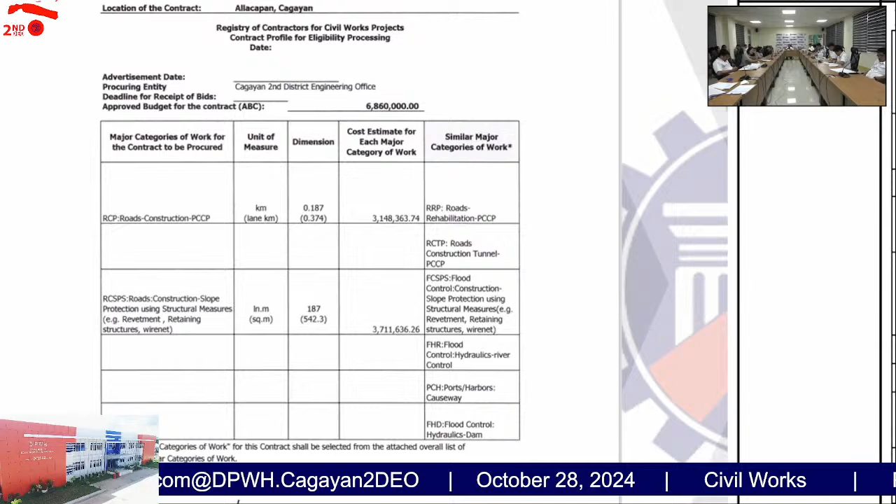The project has a net length of 187 meters with a project duration of 86 calendar days.

For the scope of works for Civil Works 1, earthworks includes individual removal of trees, embankment from borrow, and subgrade preparation. Item 200 for subbase and base course, for surface course, gravel surface course, PCCP, with a thickness of 15 centimeter and 28 centimeter respectively. And for the miscellaneous structures, trees furnishing and transplanting.

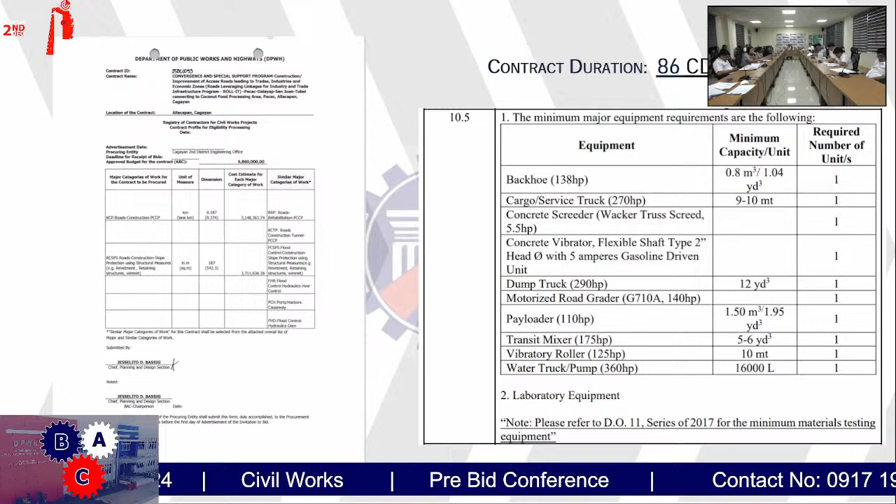For Civil Works 2, earthworks includes structure excavation and foundation fill, and drainage and slope protection structures, reinforcing steel and structural concrete. For the minimum equipment requirement: 1 backhoe, 1 cargo service truck, 1 concrete screeder, 1 concrete vibrator, 1 dump truck, 1 motorized road grader, 1 payloader, 1 transit mixer, 1 vibratory roller, 1 water truck, and 1 sealer joint. That's all, Mr. Chair.

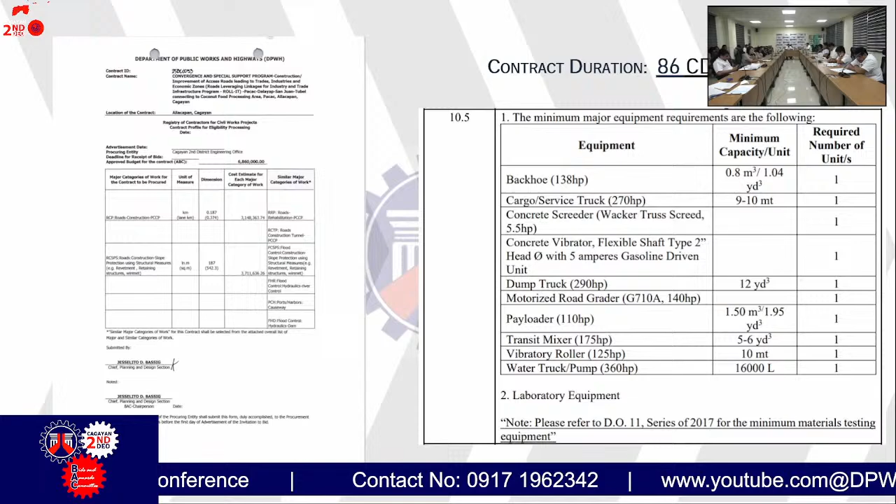Mr. Chair, for the documents required to be submitted by the bidders, we have the checklist of the technical and financial documents. First, the technical component envelope. We have the legal documents, which is the valid PhilGEPS registration certificate. And the technical documents: first, statement of the prospective bidder of all its ongoing government and private contracts, including contracts awarded but not yet started. Statement of the bidder's single largest completed contract, or the SLCC. Special power of attorney in case of joint ventures.

Original copy of bid security. The original duly signed omnibus sworn statement. And the project requirements, which shall include the following: organizational chart for the contract to be bid, the list of contractor's key personnel.

Please be reminded of the requirements of the Department Order, DPWH Department Order number 118, series of 2024, which is the guidelines on the accreditation and assignment of contractors and consultants project engineers, which states that only accredited project engineers may be assigned to DPWH projects, subject to applicable limits of assignment.